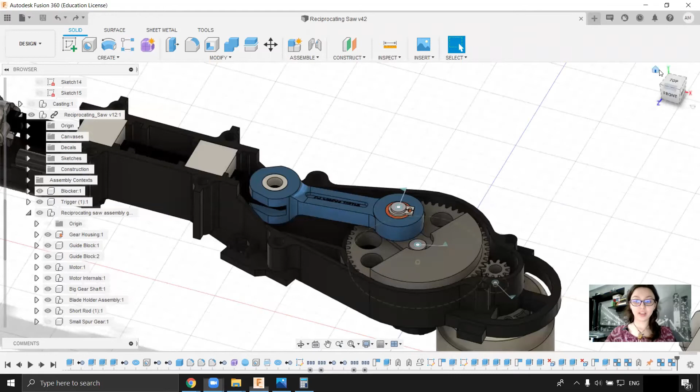In the previous videos, as you remember, we've created the motion link between the spur gear, which is small, and the big one, and between the shaft and the rod, and the connecting rod, yes. And now what we need to do is to create the linear motion from the rotational motion.

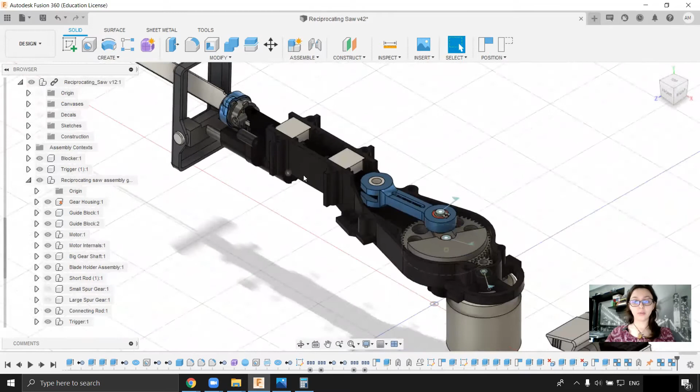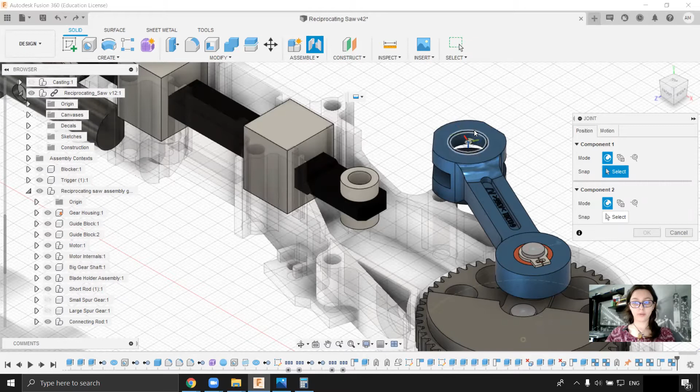So let's see. We need to link those two, but before that we need to create a rigid group between the blade holder assembly and this small part. Perfect. And I will put this here. Actually, I will do a joint, this one, and it will be a revolute joint.

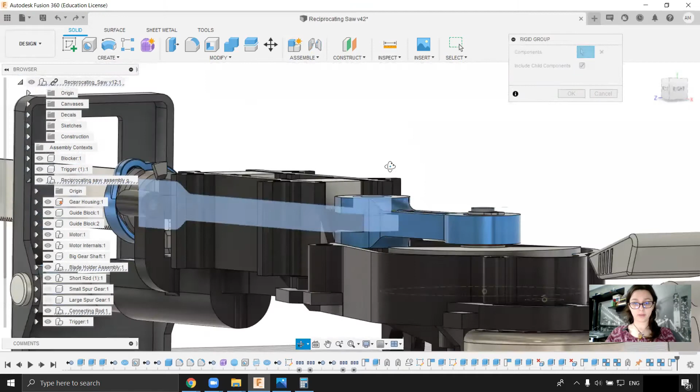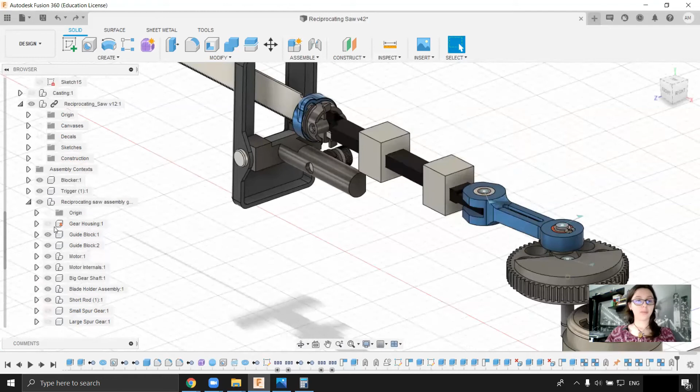Wonderful. But we have some problems. So what I will do, I will go back, put again the rigid group between this small part, and I think there is a small part here too. Perfect. And I will put an as-built joint between those two. Good. And now this is happening, but don't worry, we will fix it.

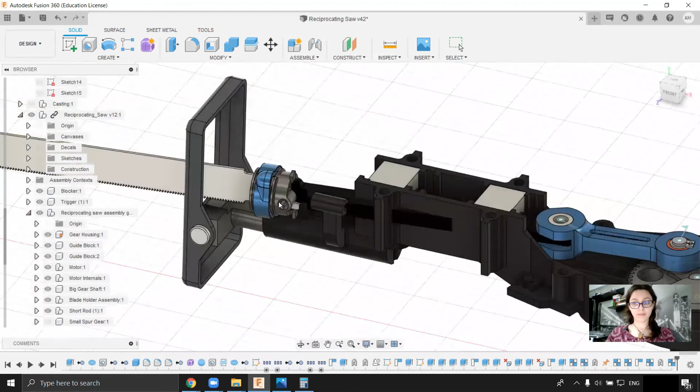So what I need to do is to make all of this a rigid group. So the blade holder assembly, and all the other parts that are here. Okay, perfect. So now I have it like that.

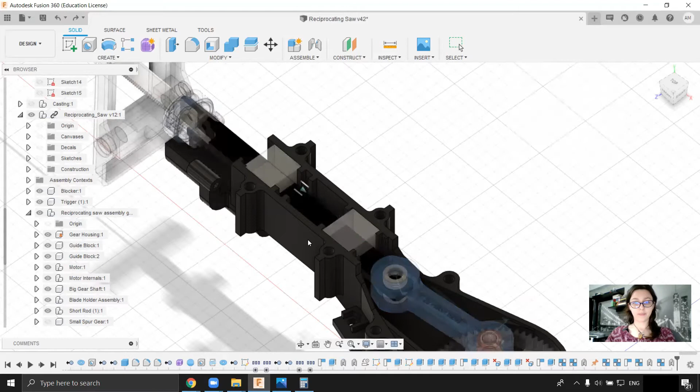But what I need when this is happening, I need this to move forward and back. So I will add an as-built joint between the blade holder assembly and the gear housing. Okay, and now it goes back and forth. Actually we need to power from this part. We have the motion needed.

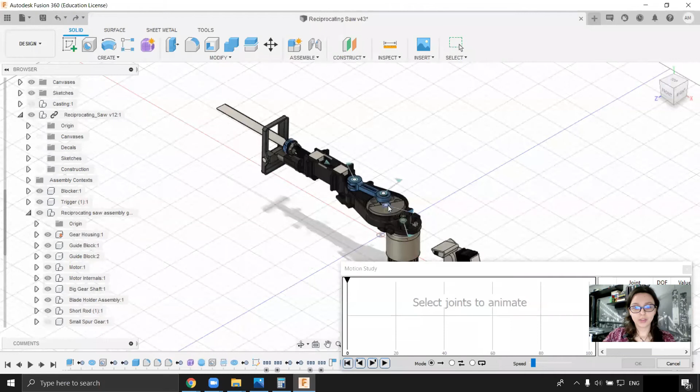So let's create a motion study, and we power this one 360 at the step 100, and let's play it on repeat, and we can increase the speed, and this is actually how a reciprocating saw is working.

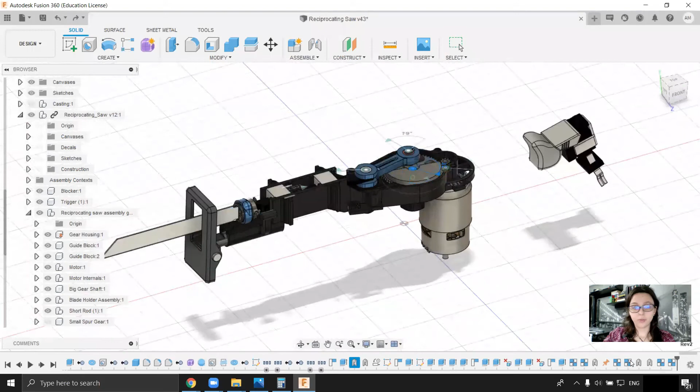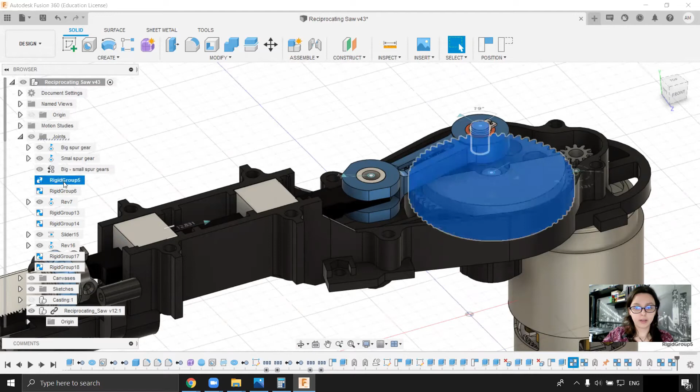Wonderful. What we need to do now is to rename all the rigid groups and all the revolve joints. So big spur gear, small spur gear, big small spur gears. This is between big gear, small shaft. Okay, small shaft rod, big gear rod.

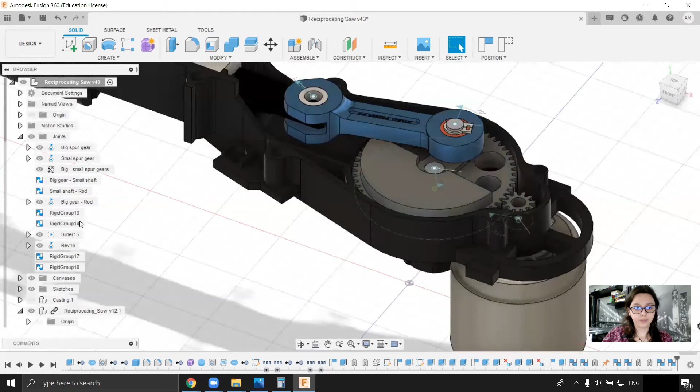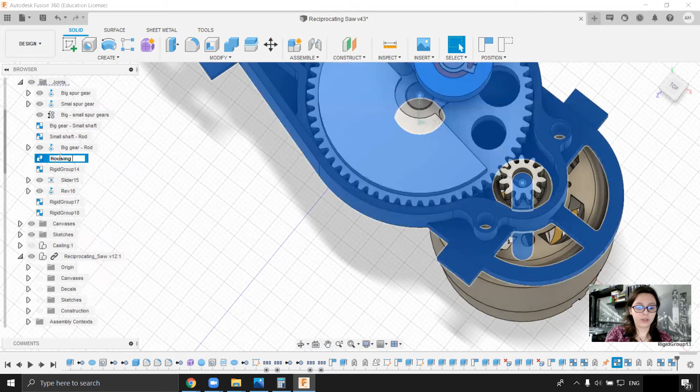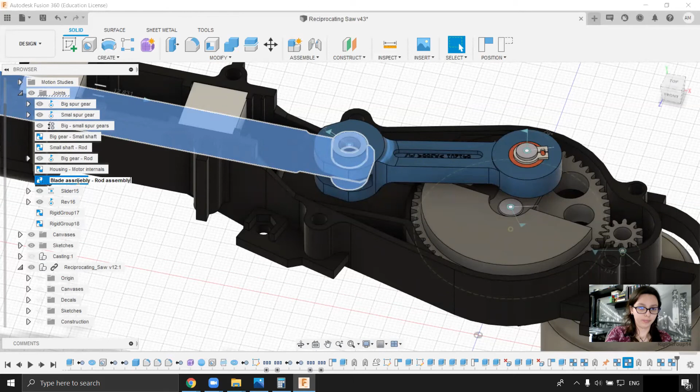Let's see the name of this part, motor internals, so housing motor internals. This is the blade holder assembly. Blade assembly, rod assembly, blade assembly, housing.

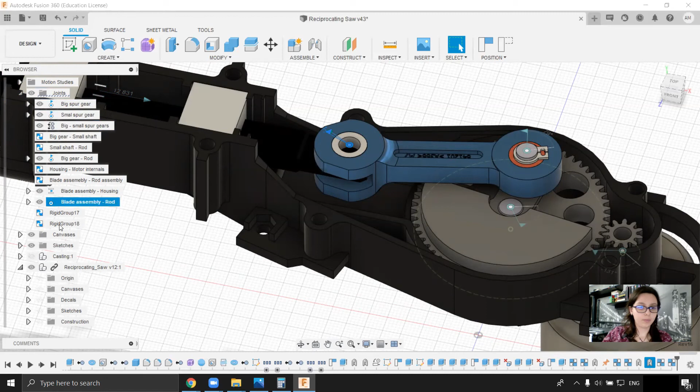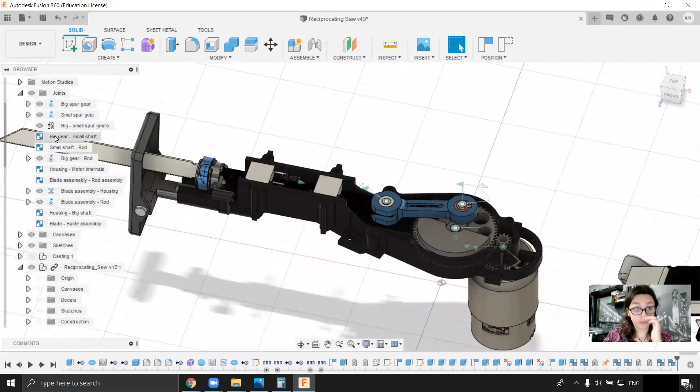Blade assembly, rod, housing, big shaft, blade assembly. Perfect. So now that everything is renamed, we can save.